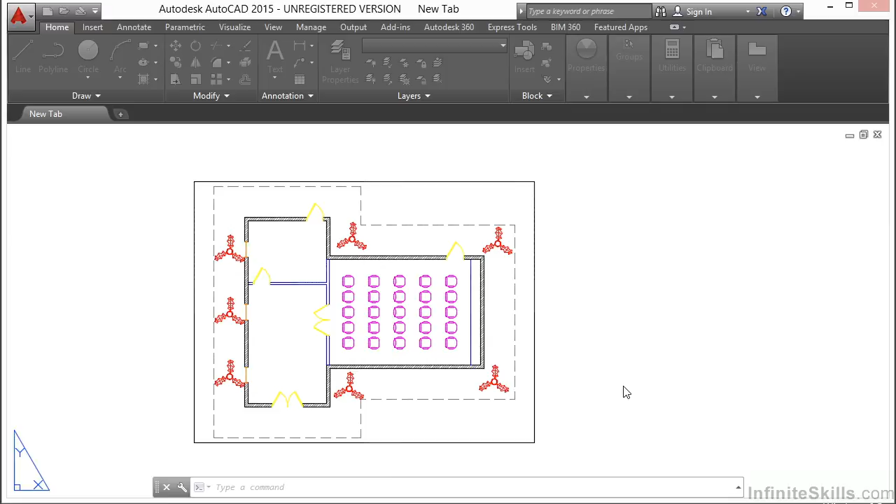Let's take a look at our annotation file. It has a few dynamic blocks in it. Go to the Model Space tab. Now, a dynamic block reference can easily be changed in a drawing while you work. You can manipulate the geometry through custom grips or custom properties. This allows you to adjust the block reference in place as necessary rather than searching for another block to insert, or to redefine the existing one, or to have to create brand new line work altogether.

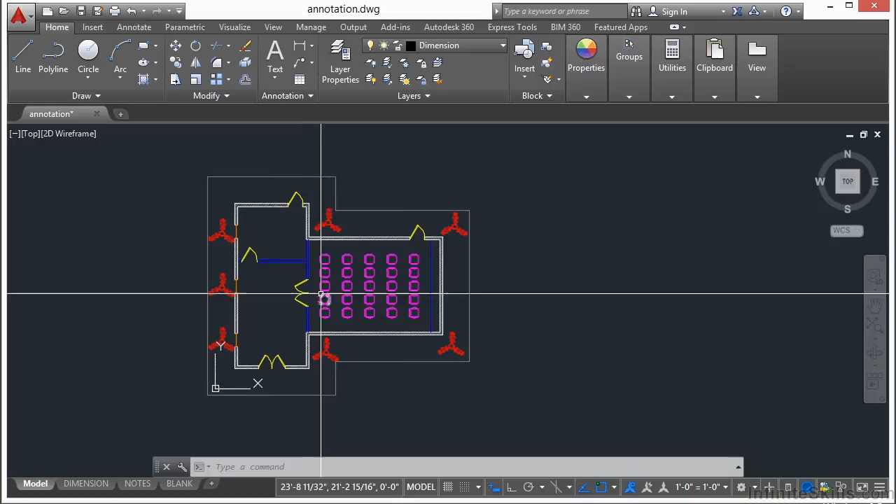So let's look at the door at the bottom corner of this building that we see here. This door block is a dynamic block. You can see here that it has a lot of different fancy grips on it. These grips are typically customized when the block is created. Let's go over some of these. You'll notice that when you hover over the grip, it will give you a bit of a tooltip. It'll tell you what it's going to do.

This sets the angle of the door opening. When I select it, I have different options. I can make the door closed. I can open it up 30 degrees, 90 degrees, 45, etc. Very useful. This grip right here sets the wall thickness. All I have to do is drag it up or down. You can see on the left, it changes from 4 inches to 5 inches to 6 inches, and the line work even changes.

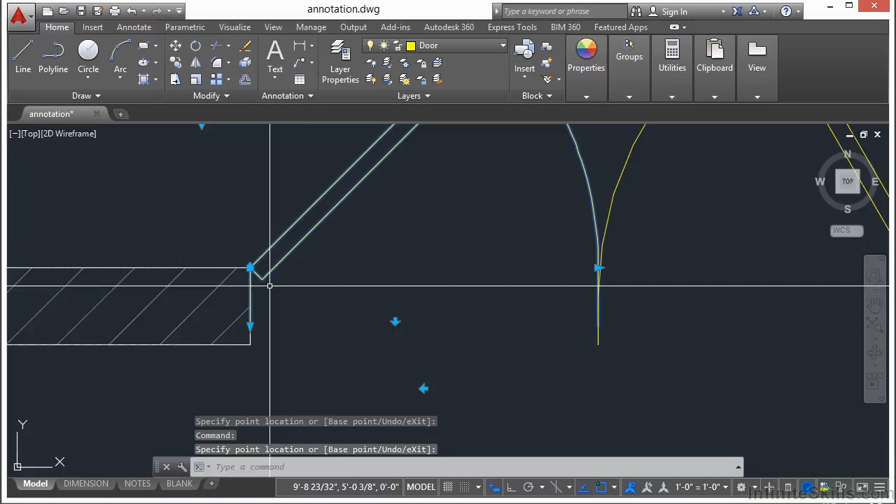This button here aligns the block. It acts sort of like the standard move. This button here will set the direction of the swing. It opens in or it opens out. It's a toggle switch. This is very similar. This will move the door in or out.

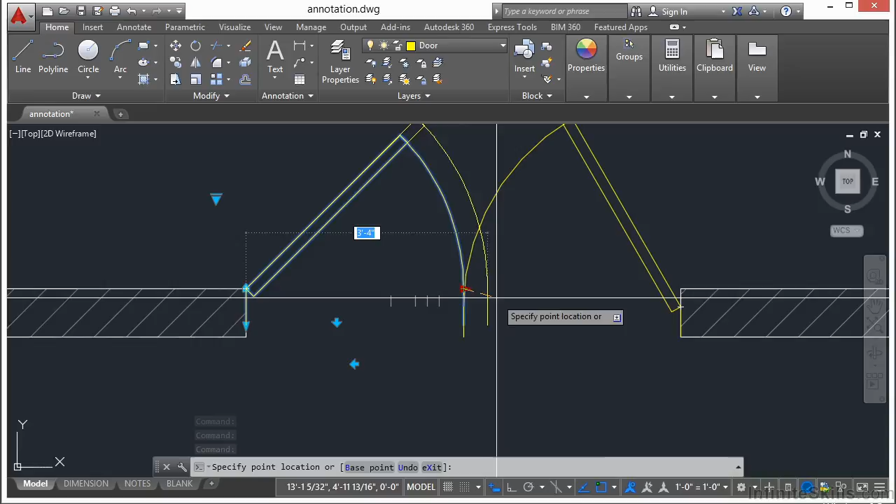And then this grip here will change the width of the door. I can stretch it out to 3 foot 4 inches or all the way into a very tiny door of 2 feet wide. Just press escape to let go of that. All of these door block instances that you see here are the same block. It's very useful and helps in your design process.

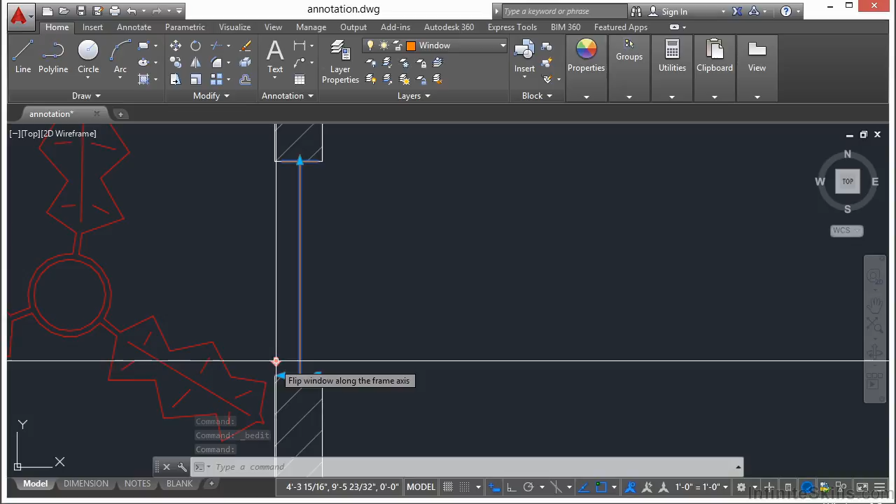Now, the window block next to these doors over here is very similar. It looks very simple. It looks like just 3 sets of lines. When I select it, I get similar grips to what I saw before. This will flip it back and forth from side to side. This changes the width. This relocates it to somewhere else. And this changes the width. This one is the thickness, depending on your wall. So you can see here, these blocks are very neat, very useful, and they can help out quite a bit.

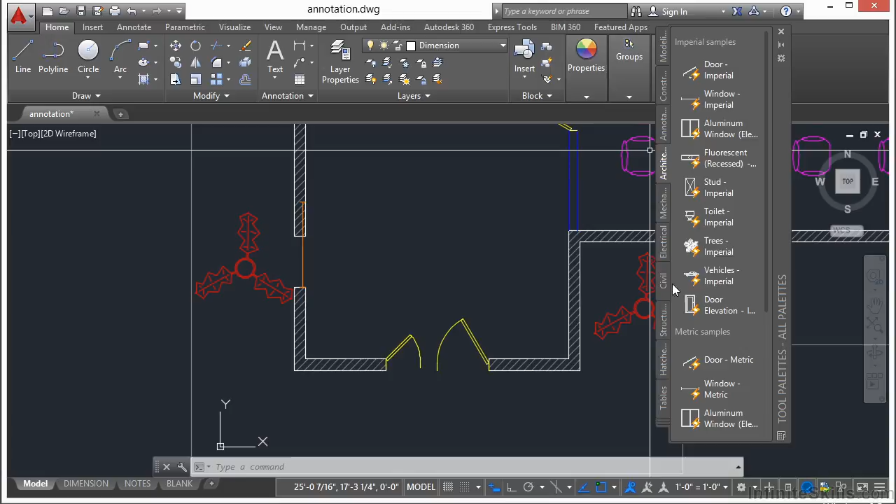Now, AutoCAD comes with several dynamic blocks already made. If you open up your tool palette by pressing the Control key and the number 3 at the same time, you'll get access to a lot of them. This is the door and window dynamic block that's already in this file. When you look at this tool palette, you can tell if a block is dynamic or not because it has that little lightning bolt in it.

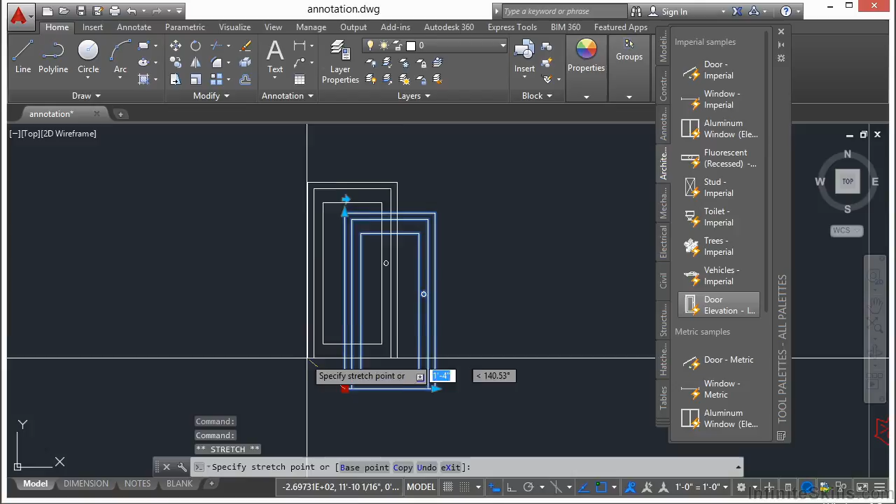Here's an elevation view of a door. I'm going to insert it, select it, and here I can change the width, I can change the height, and I can flip it to the left or to the right. And here I can move it around. Very simple, but yet it adds a lot of different dynamic abilities to it.

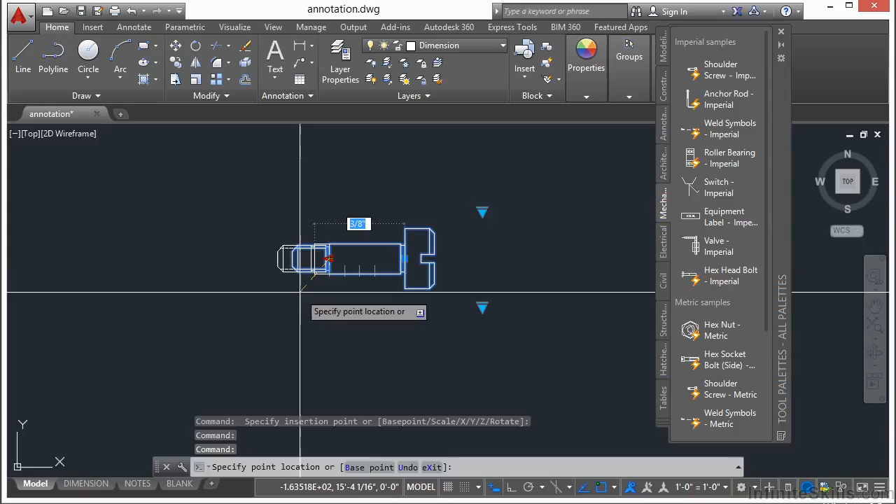If I go from this architectural tab to the mechanical tab, you can see here I have a lot of other shoulder screws and anchor rods and things like that. If I select this shoulder screw, I can change the length of it, I can change the size and the style. So you can see here, there are a lot of different types of screws that I have available to me in one block.

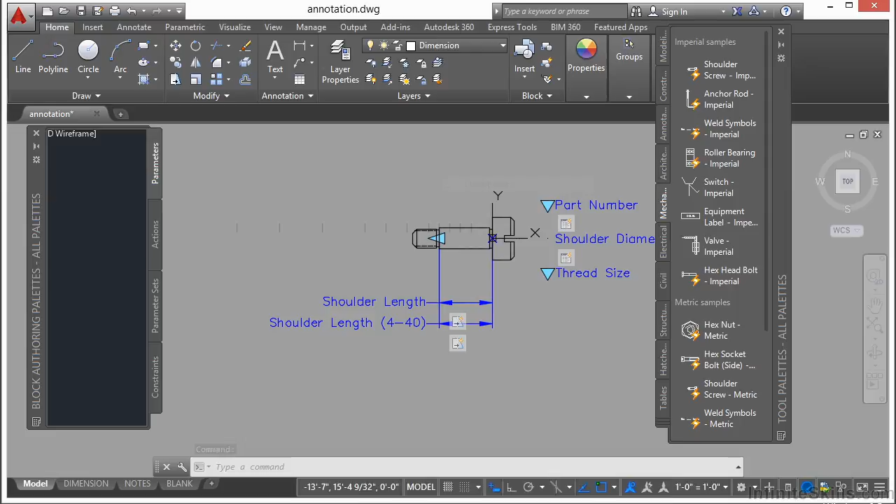Dynamic blocks are great to use, and they are a little bit more complicated to edit and create. If I select it, right click, go to the block editor, you can see here I have all of these different constraints set in my block. They control the input and the output that the user will have when they interact with the dynamic block. We don't have the time to go over these in this training video, but I wanted you to be aware of dynamic blocks and their usefulness.